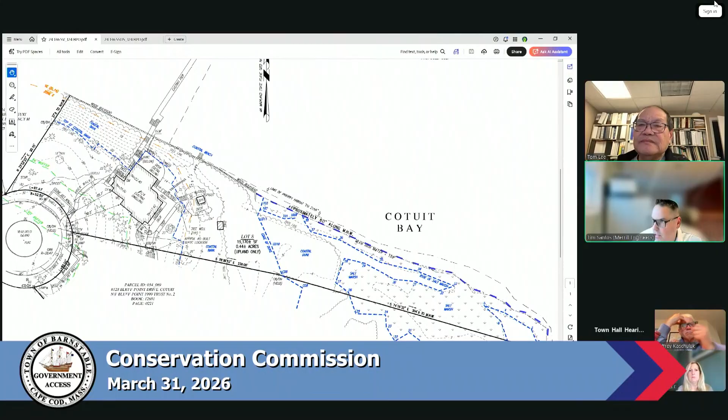So I'm going to switch over to the proposed plan. What the applicant is wishing to do is to tear down the existing home, construct a new home and deck, which will be serviced by a new Title V compliant septic system with denitrification components as far away from the top of the bank as possible. All the roof runoff will be collected and diverted to a dry well.

The applicant is pulling the house back from the top of the bank where it sits now. When we did our redevelopment calcs, there was a reduction within the 0 to 50-foot buffer of 370 square feet, but there is an increase within the 50 to 100-foot buffer of 719 square feet. So in order to meet your performance standards, we're required to plant 2,157 square feet of mitigation plantings.

We're actually proposing to plant over 2,800 square feet. There is 1,150 square feet that runs along the top of the bank into the north of the house and existing lawn areas to the west of the house. And then to the north of the house, there's lawn and existing developed areas that currently is a deck with a spa and some walkways that we're proposing to remove and plant. That's 1,650 square feet, totaling that 2,800 square feet of mitigation plantings.

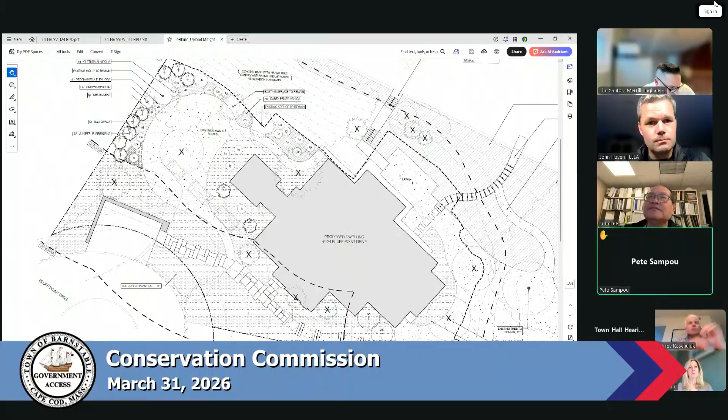Follow-up question? Sure. Pete? Okay, so yes, you have an equal number of trees going back. If you were to base it instead on diameter of the trees, what's the ratio of the total diameter of the trees that are being cut compared to the total diameter of the trees that are going in? Because sometimes we actually ask for, if you cut a 12-inch tree, then maybe you should be putting in 2 smaller ones. So if you could just brief me, the rest of the commission, and the public on that ratio, please.

Tim, do we have that information readily available? I don't know if we ever added the total. I don't have that readily available right now. I would just ask that can we just let Wilkinson do their presentation, and then we can address all the questions at once? Sure. Because the overall project, there's 2,157 required for mitigation. We're proposing 2,800 of mitigation plus an additional 3,900 square feet of invasive removal, plus the D-Night system.

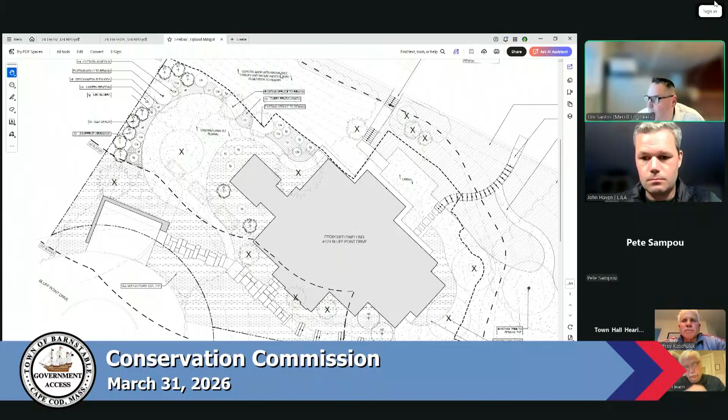So yep, the overall project is definitely an improvement, but let me see if I can get that number while Ian's looking at his, even if it's just a rough estimate. Yeah, not a problem. And Peter, as you recall, that's usually done at chest height. That's usually what we look at. Right. Yes. Ian? All right, thank you very much.

I'll share my screen briefly. And can let me know that this is being seen. I'm going to show both the plan and this diagram, which I think is a simplified way to look at it. For the record, Ian Peach, presenting the project tonight from Wilkinson Ecological Design. Our ecological restoration design really has 2 primary aims. Create a vegetated buffer along the top of the bank, where none currently exists, and enhance existing vegetated buffers to protect the resource areas of the property.

We also want to restore, you can see over here in the lighter green, with the mind to conserve this really nice existing native tree canopy and understory, and protect it from invasive plants moving across into that area. That is really nice overstory and understory to make one comprehensive mitigation approach. We're finding on site in our invasive plant management areas shrub honeysuckle, Asiatic bittersweet, multiflora rose, vine honeysuckle, rugosa rose.

I pointed out that area on the western portion of the bank, which I think is important to note, that we're going to amplify and lock into what's an existing area, conserve that and protect that by doing native plant community restoration and invasive plant management. I also want to note that to the further east side, we have an existing cedar grove, similar condition. Really important to get in there, manage the invasive vines and plants before that is further degraded. So really, we're kind of locking in the 2 areas, helping them from degrading further or beginning to degrade, and connecting them with a focused invasive plant management and native plant restoration approach.

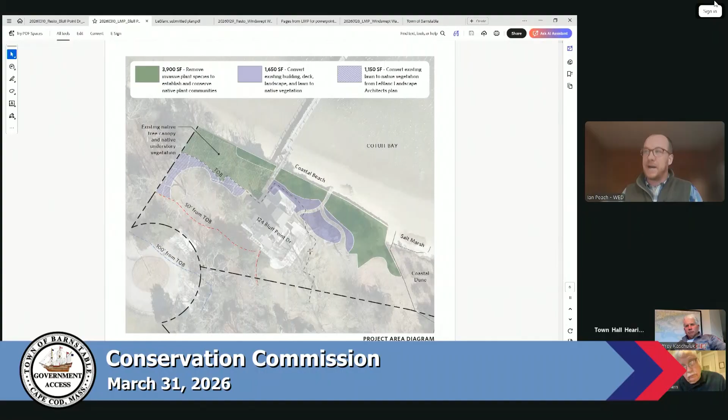And then we're going to have an expanded buffer and an expanded wildlife corridor, which is what we're always looking for. If I zoomed out right now, you'd see that it's going to create a little bit of connectivity further to the east, and we're working across the entire area. So that's really what I wanted to point out. I'm happy to speak more to our methods and specific species, but overall, including that invasive plant management and that lawn conversion to native plant communities, we're looking at 5,550 square feet of mitigation for the project. So happy to talk to anything further.

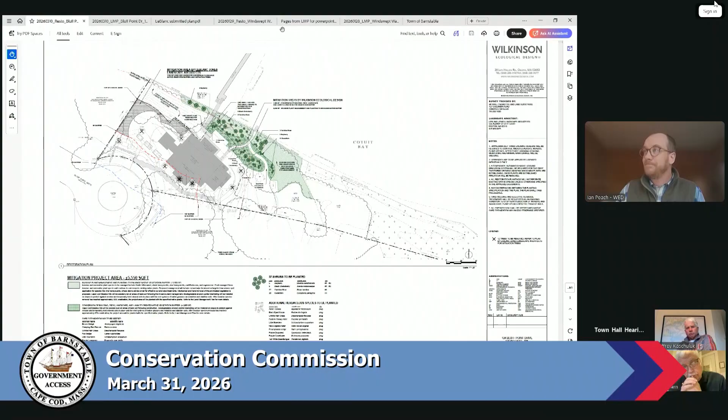Thank you, Ian. Any questions from the commission? I do. John? Oh, sorry. Bill had his hand up. Bill? Well, yeah, the narrative suggests that the limit of work is about 40 feet from the coastal dune. That was kind of a minor flag for me, but I'm thinking all that amounts to is invasive management. Is that right? Or perhaps deck removal? Let me bring up the site plan. Hold on a second.

So the coastal dune is down here, if you can see where my hand's moving around. Yep. And there's an existing shed where the limit of work's going to run right in this area right here. So there is no work being proposed in the dune, near the dune. The limit of work's going to run along the existing tree line. Okay, thanks. John? No, Rob has got his hand up. Oh, Rob? Is there any way you can bring up the proposed plan? It's up right now. This is the proposed? That's the proposed, yes.

All right, so behind the house, where the number 18 is, what is that? That's just a lawn area. Currently, right now, that's a deck area. So what's that going to be? It's gonna be a lawn. Right now it's a deck, and it's gonna be a lawn area. Do we really want a lawn that close? I mean, I'm asking my fellow commissioners.

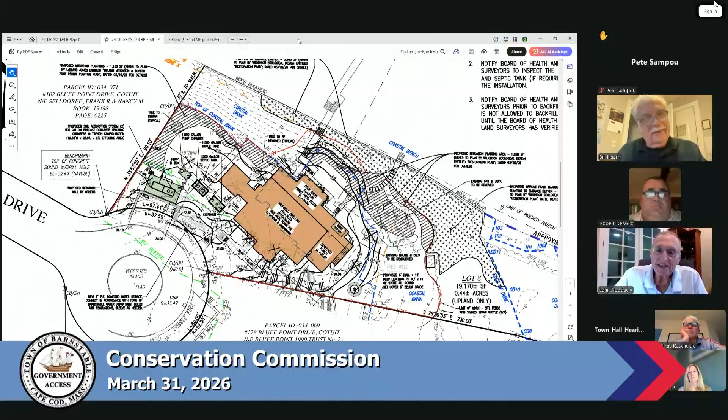Well said, Bill. A couple of things, Tim, on your mitigation calculations. I think you have some credit that you did not include in your calculations, because in your net alteration within the 50-foot buffer, you have minus 370. Yeah, so we didn't claim that. I was on while another project was going on, so there was some kind of conversation. So I went with a very conservative approach and just went 3 times the 719. We didn't go 719 minus the 370, then 3 times. So it's probably even more than what they need. Okay, I just want to be honest with you in terms of the calculations.

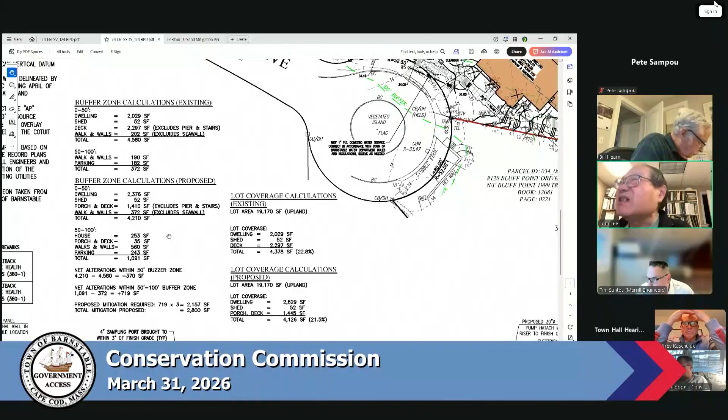Secondly, I think we need some distance from the bulkhead to your building. Right now, there's no distance label. So I need revised plans to show me some distance on that one. Yeah, that's not a problem. I can get that added for you. And then I think we would probably need some demarcation on the mitigation area. So are you asking for it as part of a condition, demarcation so that it doesn't get cut into? Yeah, I want that included as part of the revised plan. When you're adding the dimension, you're adding the demarcation line along the mitigation area.

So what would the commission be looking for as far as a demarcation, just so LeBlanc can weigh in on whether that's acceptable to them? We have a few alternatives: some stone every so often. You do wooden posts, concrete bollards, stones, fences, single rail. I've seen different boards with different things, single rail, the concrete bollards with some type of rope. I've also seen stones every 25, 50 feet, depending on what it was. Right. Okay, I'll talk with John about that. So we're open on that one. You can take your choice.

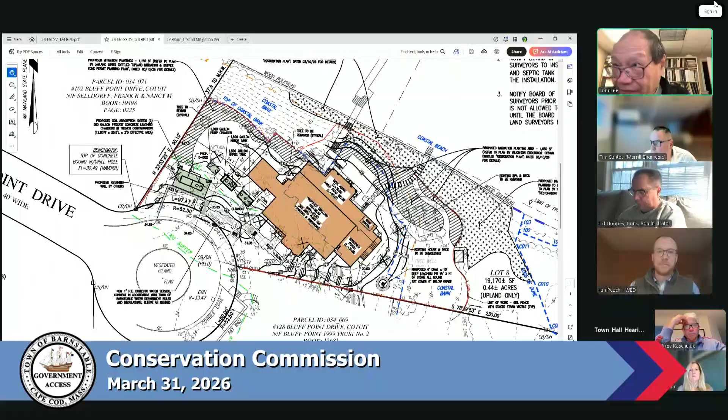And I just wanted to know whether or not they need an ongoing condition for invasive control. I think you probably need one, right? You want one? I would suggest it. Yes, that would be preferred. Okay. Channel 18, any public comment on this one?

Seeing none. Could I have a motion to approve this project with the condition of subject to receipt of a revised plan showing the distance from the bulkhead and the demarcation lines, the coastal bank clarifications, and I think that's about it, right? Oh, and labeled the lawn area. And then with ongoing conditions for the invasive removal, and then a monitoring report for 3 years. So move, Tom, if you're ready. Yep. So move. Second. Roll call.

Abadili. Just a comment too, we push this denitrification. It's voluntary now, so I want to thank the applicant for doing that. I personally think that's a critical aspect of improving our environment. So thank you. I vote yes. I agree. DeMello. Aye. I'm voting aye. Lee. Aye. Kaschuluk. Aye. And Sampu. Aye. And that is unanimous.

Thank you. Good luck. Thank you for your time. Have a great week. Yep.

Thank you. The second NOI is Henry Blair Trustee, Henry E. Blair and Raymond M. Murphy Trust. Maintenance dredging of Mill Way Marina at 275, 277, and 295 Millway Road, Barnstable, as shown on the assessor's map 301, parcel 063-001, 063-002, and 065-001. Who would that be?

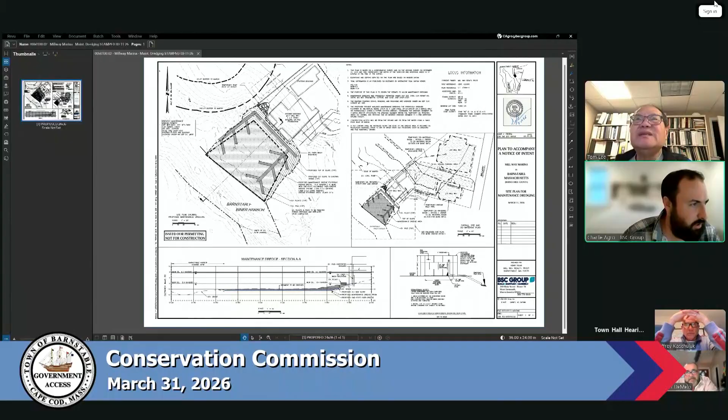We're proposing dredging by both hydraulic and mechanical means. So that would be a hydraulic dredge, such as the county dredge, which concurrently dredges and pumps the sand up to an upland area. So we're proposing 2 dewatering containment areas as shown in the overall site and dewatering plan. And then we're also proposing the project be completed by mechanical means such as an excavator on a barge or clamshell dredge. It was previously dredged in 2020 with a cutter suction dredge and then cleaned up in the summer of 2020 by an excavator on a barge.

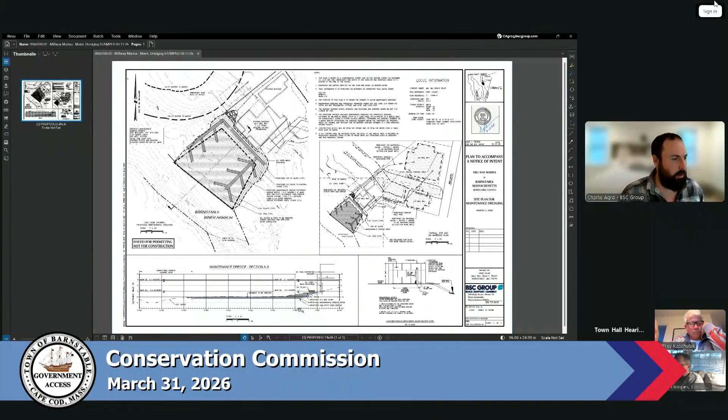This project will have to go through Chapter 91, 401 water quality certification, and Army Corps of Engineers permitting. We did also go through Waterways Committee last week, and they approved the project with few concerns. We'll also be going before the Shellfish Advisory Committee, I believe on the 8th of April. We also received a Division of Marine Fisheries comment letter, which listed some time of year restrictions, which we plan to adhere to unless there's some kind of emergency where we'd have to apply for a time of year exemption.

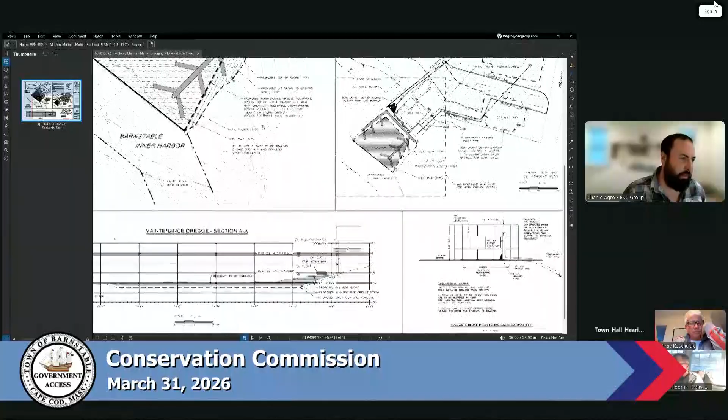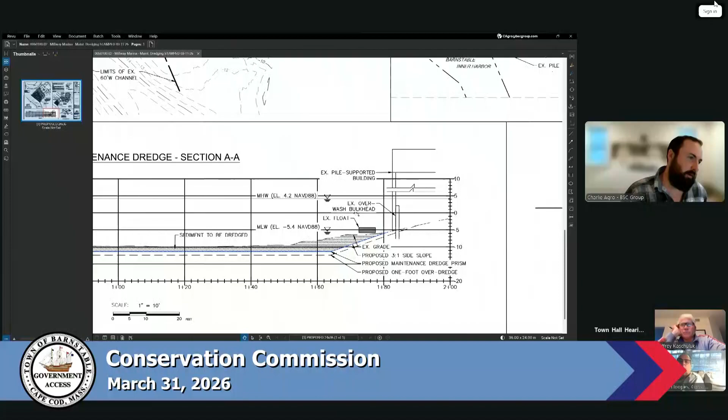One of the other comments also mentioned dredging within 25 feet of the mean low water line. That concern is addressed by the existing overwash bulkhead. There's a bulkhead that's existing between the offshore dredge area and the beach itself. So sloughing will not occur in this instance because the bulkhead is retaining that sediment. Open up to any questions at this time.

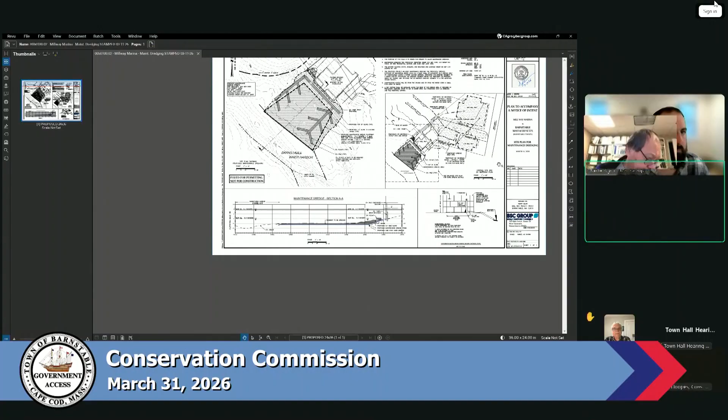Thank you. Any questions from the commissioners? Bill? Can we go back to full screen? Here we go. I'm a little confused about the dewatering. The narrative suggested dewatering either on a barge or in a parking lot, and yet you have a parking lot, and it looks like you have done that before.

Are you thinking that what does it mean to dewater on a barge? It sounds like you're liable to have sedimentation in the water. Is that true? So dewatering on the barge would be if it was...

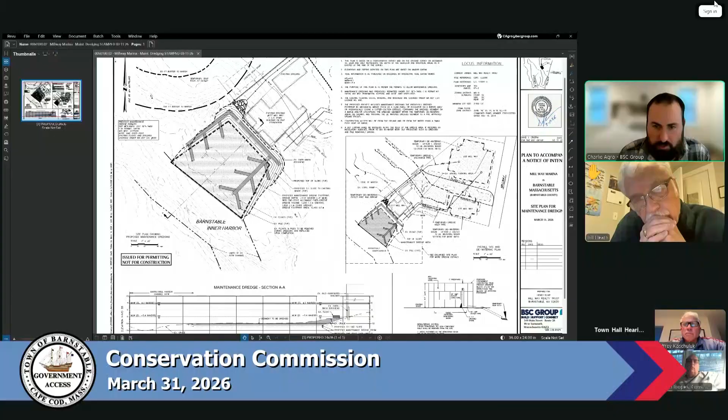Dredged by mechanical means, by a clamshell dredge or excavator on a barge. Local companies such as Robert B. Our or Hyannis Marina have excavator on a barge type dredges with a holding tank that's on the barge itself. They'll scoop the sediment with the bucket from the excavator and put it in the holding container that's on the barge. Larger companies will have a scow, which is a separate, bigger barge.

This is a relatively small project. We're looking at 1,200 cubic yards to the design grade, and then an additional 600 cubic yards on top of that to the 1 foot over dredge. So relatively small dredging project.

But when it goes into a barge, then what happens to the wastewater or whatever? So typically when you're loading into a barge, you would continue adding the sediment, which contains some water as well. As you're adding the sediment to the barge, eventually water will start to seep out through the weep holes in the walls of the barge or over the top of the barge. Eventually the sediment will be transferred to a pre-approved upland disposal site. Like if Robert B. Our, for instance, does the project, they have their own pre-approved disposal site with an approved BUD, so they can drive their barge right to their facility and offload the material upland.

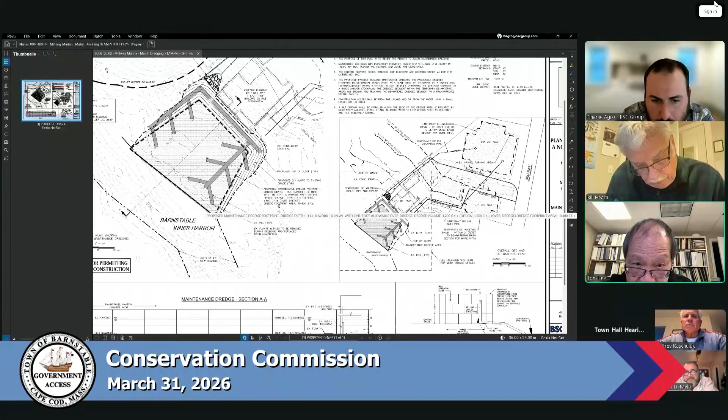While you guys are thinking, I just want to read the comment from the DMF letter that Charlie was mentioning. DMF has about 4 comments. One, a time of year restriction should be observed on all in-water activity to protect the sensitive life stage of winter flounder and horseshoe crabs. No in-water silt-producing activities such as dredging should take place from February 1st to June 30th of any year.

However, work may take place from February 1st to April 30th if the proposed silt curtain is installed prior to February 1st. The second one is DMF recommends the top of the slope be no closer than 25 feet from the mean low water line. Dredging the toe of the slope near the mean low water line may result in the sloughing of the intertidal habitat. The dredging footprint, as proposed, does not meet this recommendation. I think Charlie addressed that point already from that discussion.

The third, if approved, any activities requiring a barge should be restricted to 2 hours before and after high tide to prevent barge grounding in the marine habitat. The fourth one is the fuel spill from the refilling of the construction equipment will adversely impact sensitive resource areas. Impacts to resource areas can be avoided by prohibiting all land-based equipment from being refilled on site. If equipment is refilling on site, adequate containment and cleanup material should be required to minimize the impacts.

The other thing, Charlie, we have not received the DEP number. Is that correct from your record? I am not 100% sure, I can look into that. As far as our office record, we have not received the DEP number.

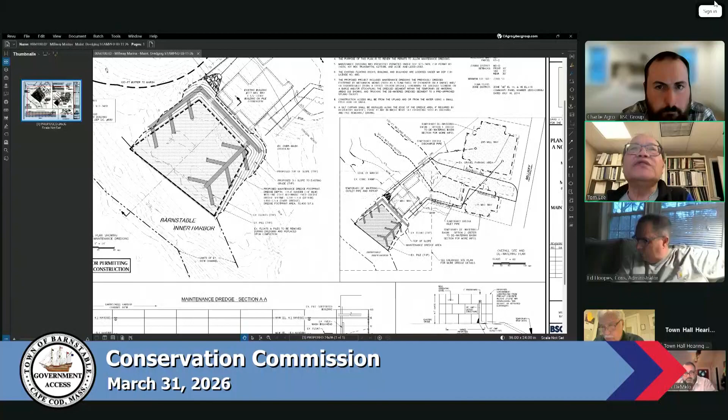Understood. Ed, is there any shellfish comment on this from Natural Resource? No, we have not gotten any letters from that, and I believe you said they are scheduled for Shellfish Committee. I'm sorry, I know you said the date, but I don't know if it's the 18th. April, I think 8th. April 8th.

We're getting here from Waterways, I think, Tom. Yeah, the Waterways approved the project. Yep, I saw that too. So I would suggest, Tom, then as you continue, wait for the shellfish comment and DEP number.

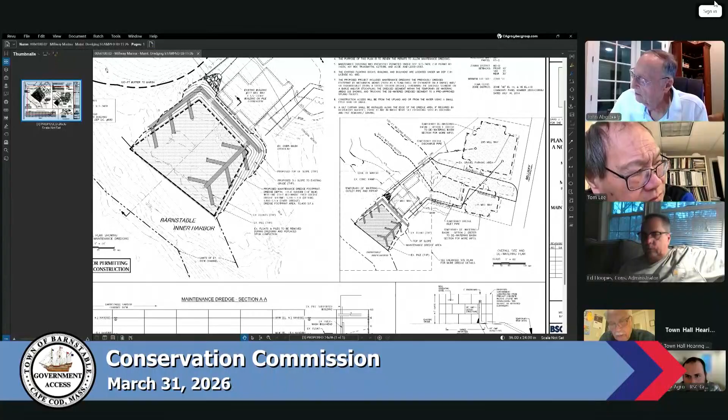Okay, Bill, your hand's up. Yes, it is. Are we going to be applying the DMF conditions to the permit? I think it's the time of year restrictions. What about the other requirements about fuel and barges, the low tide restrictions, et cetera?

Yeah, I'd like to make a comment on that third DMF comment, if you guys are okay with that. Go ahead. So they say that the dredging shouldn't take place at any other times outside of 2 hours before and after high tide, which is a pretty tight window, and we've already got... it's actually a pretty deep site right now.

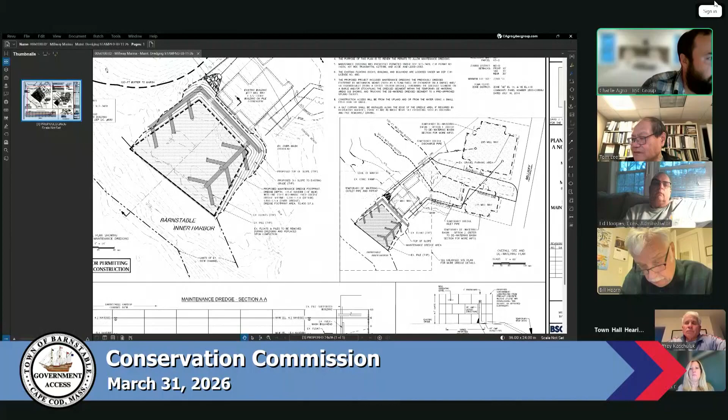It's pretty close to 6 feet at mean low water, and it's just the shallow portions of the marina that need to be dredged. So I think the condition should read that there needs to be 2 or 3 feet or so below the barge.

I think when they say 2 hours either side of high tide, I don't think they actually took into account what the actual depths are on site, or what the barge itself drafts. You bring in a huge barge and it'll be aground right away at high tide. If you bring in a small barge, you could probably do the work at low tide without ever hitting ground. So I think that's just a little too vague in general.

I think the more important part of that condition is that the barge does not ground out. So if it's 3 hours on either side, whatever it is, that's okay—it's more important that the barge does not ground out. I just don't want to restrict construction to a 4-hour tidal window each tide cycle; that would be pretty tough for the contractor.

The other thing I want to mention is, since you dredged this area before, we must have previous order conditions, and we can look at what's in that condition since we're continuing with this. Also, since this was previously dredged, I want to double check in our file whether you have a file on the footprint, to make sure the footprint matches what you're applying for.

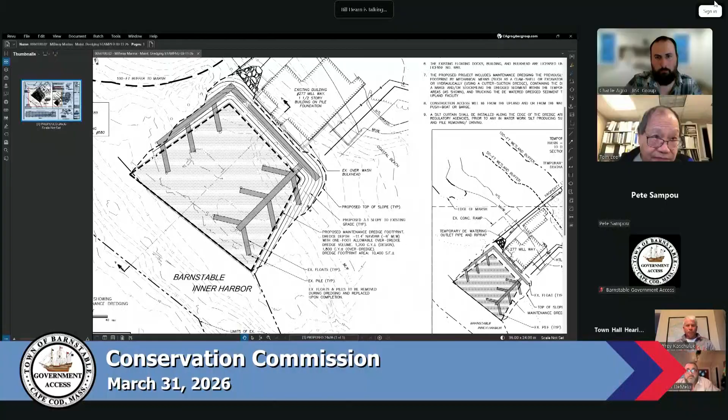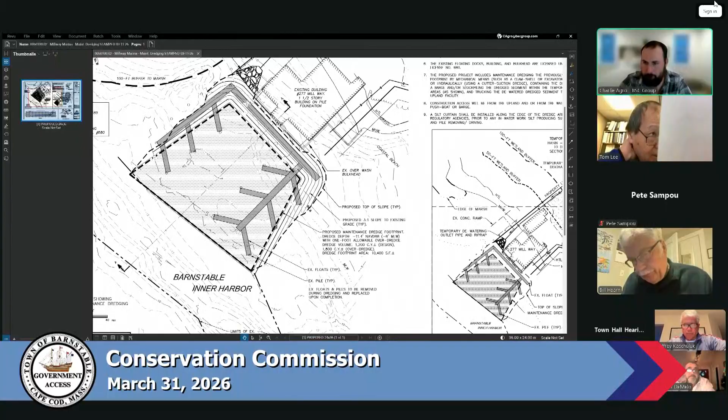The last NOI of this evening is Gary Sobel, proposing construction of additions and renovations to an existing single-family dwelling, and after-the-fact repair and replacement of a wooden stairway to the beach at 546 Wakeby Road, Marston's Mills, as shown on assessor's map 028, parcel 028.

Good evening, Chairman Lee, members of the commission. Dan Ojala, surveyor and civil engineer with Down Cape Engineering in Yarmouthport, helping Gary Sobel with permitting at his property at 546 Wakeby Road out in the Mills. I'll share my screen so you can look at the project.

It's overall a fairly modest proposal on a huge site, over 2 acres, with almost 1.9 acres of upland. It's on Long Pond, just east of the camp to our left. There's a small private pond on the east with a little bordering vegetated wetland around it, and of course the edge of Long Pond, a great pond, with wetland flags delineated by Brad Hall.

We're here for a small addition mostly outside the resource areas—outside the 100-foot buffer except for a couple little nicks—plus some infill of a porch in the 50 to 100 foot zone, all landward of the existing development. It's an older home that's been there many years; we put in a 5-bedroom septic back in 2013 or so, and this proposal is pretty benign, putting in a roof drain to handle the roof runoff.

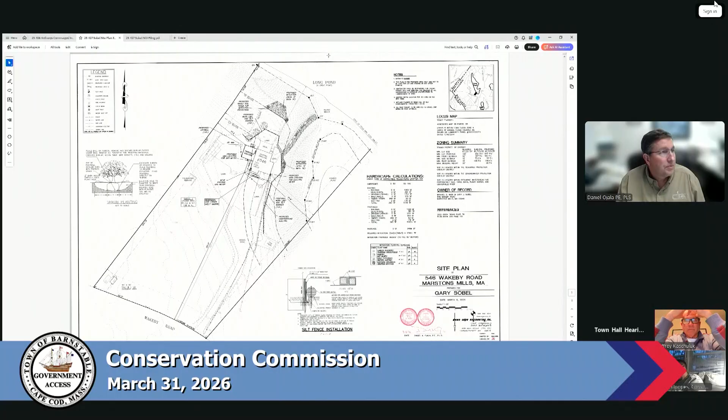Your regulation does have a backstop—if you fully mitigate the 50, then you can have hardscape outside of that. So I would respectfully ask not to infill that little bit extra, since it would be awkward to do. We meet the letter of the law, and he's a pretty good steward of the land—it's almost all natural except for the little house footprint on that big 2-acre site.

Okay, then, thank you. Any question from the commissioners? None? Channel 18, any public comment on this one? Seeing none.

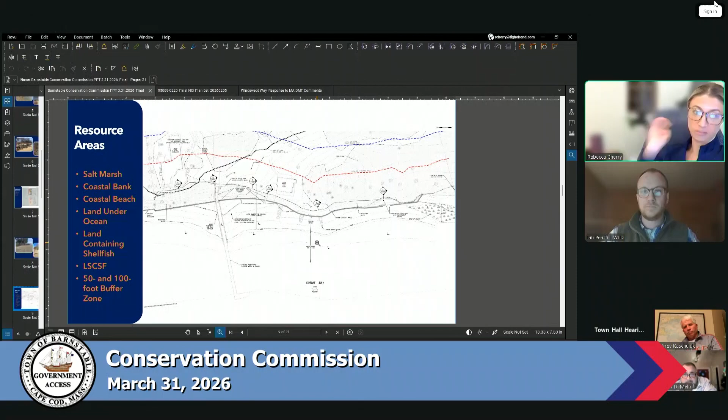Project need. So for obvious reasons, the existing seawall is failing. And it's at increasing risk for partial or even complete failure, whether that be from rising water levels or increased frequency or intensity of storms, storm surge. And with that risk comes the risk of the destabilization of the coastal bank and therefore the potential negative impacts to the adjacent resources surrounding that coastal bank. And further beyond that, with the existing structures so close to that coastal bank, the destabilization of that could compromise the structural integrity of those adjacent buildings.

So the primary goal of this project was to maintain the current function of the existing seawall, but obviously extend the life with a new structure and also preserve the visual character and the ecological function and continuity of the shoreline as a whole.

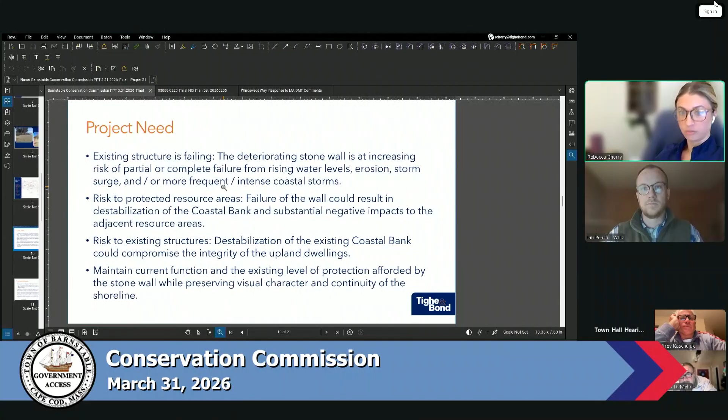So getting into proposed activities. So the roughly 500 linear feet of the existing deteriorated stone wall is proposed to be replaced with around 375 linear feet of an anchored timber bulkhead, and then around 130 feet of that nature-based solution, that fiber roll array that Ian mentioned previously.

And the reason we kind of broke it into two pieces is we really wanted the northern portion of the site, where there's existing infrastructure and developed upland directly abutting the bay, we wanted to put the structural support in that area, and then where the shoreline transitions into a more undeveloped natural condition, we propose the fiber roll array in the aim to maintain that ecological function and also minimize impacts to the coastal bank and the adjacent salt marsh.

So we also have oriented the transitions at either end of those elements, the timber bulkhead and the fiber roll array, to minimize potential for end effects associated with abrupt changes in shoreline geometry. We wanted to try and minimize anything associated with those types of negative impacts.

And supplementary to the major portion of work, there is going to be minor removal and restacking of those existing groins, probably just a little bit of the stones in front of the existing wall, to be able to put the new wall in. And then same with the timber pier, just a minor amount of pulling off of the superstructure, the decking, to be able to put the new wall in, and then that'll just go right back.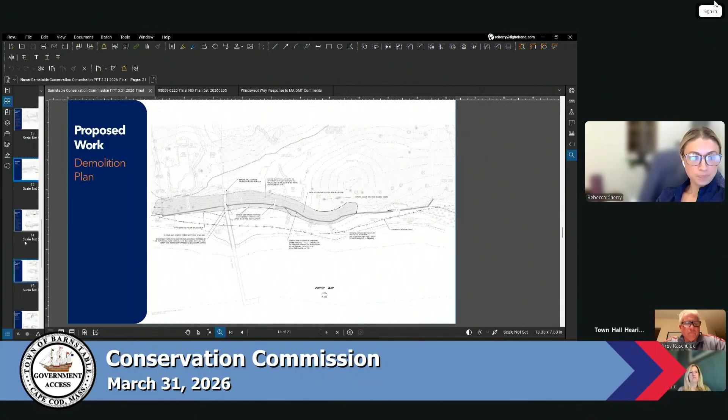And then getting into the proposed work plan. So this plan shows, and I can go into more detail on the full scale plans at the end of this if you'd like, but this just shows the general layout of the new timber bulkhead following the alignment of the existing stone seawall, and then the nature-based solution fiber roll array at the south end of the site.

And anticipated construction sequencing basically starts with mobilization of equipment, staging, erosion control, and setting up support of excavation, followed by the excavation needed to remove the seawall, removing of the existing seawall, installation of the new bulkhead, so the piles, anchors, wales, and sheathing. Again, this is timber. And followed by the installation of the fiber roll array to the south, the replacement of these two small timber stairways, which you can see one over here and one's over here.

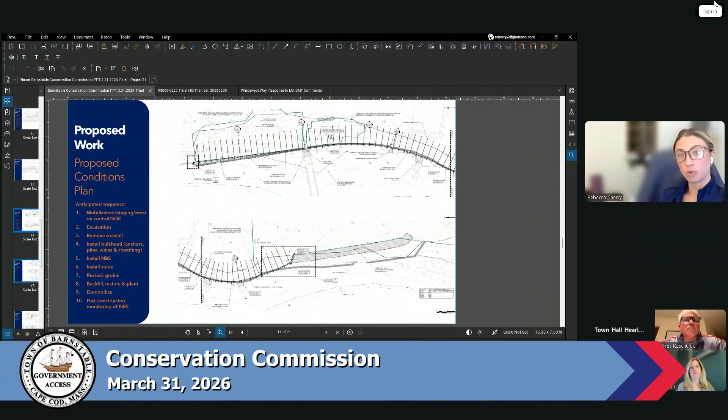And then the restacking of the small portions of groin that are removed, the replacement of the small portion of the timber pier superstructure, and then the backfilling and restoration and planting of the upland behind the new wall, followed by demobilization and then post-construction monitoring of the fiber roll array as needed.

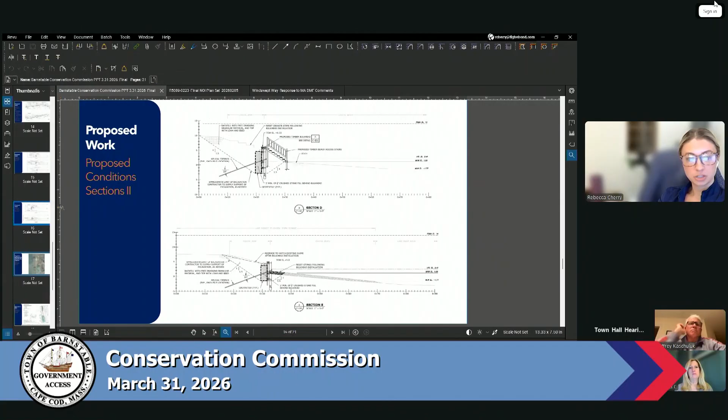These two slides are just quick illustrations of section views of the bulkhead along the alignment. Again, I can go into these more in detail later if you'd like to see more, but just to give you a general view of what we're looking at here in section view. And then followed by Ian, here's where we can talk about the vegetation management and restoration. I have this slide and then I have the following plan on the next slide. So let me know how you'd like to.

Thank you. I'll be pretty efficient here because I sort of set the table. So I appreciate commissioners bearing with us while we lay out all the details. So this just more clearly depicts that north and south area as a comprehensive approach. Both areas will receive invasive plant management for the species I mentioned. They will receive a native seed mix, and an erosion control blanket where needed on certain slopes.

And then that blue area is the really interesting and important adjacent existing native plant community, sort of savanna-like meadow with both shrubs, overstory, and really encouraging species to see, so we feel like we get extra benefit by managing the invasive species that are in their heaviest concentration directly adjacent. This area also, in terms of the invasive plant management, is directly behind the nature-based solution of the fiber roll array.

So working seaward to landward, we've really got a nice approach to actually be able to manage the shoreline with a fiber roll array, nourish and plant with a 3-to-1 slope so we can really get some nice salt-tolerant native species actually growing on the bank. Then it will transition going inland to the invasive plant management and native plant community area, and then to that protected meadow area that we want to conserve and just manage through thoughtful mowing and some early detection, rapid response if we see any invasive plants. So that's the real approach.

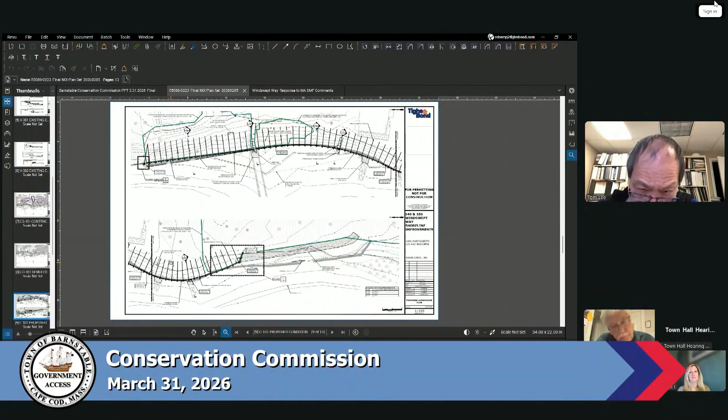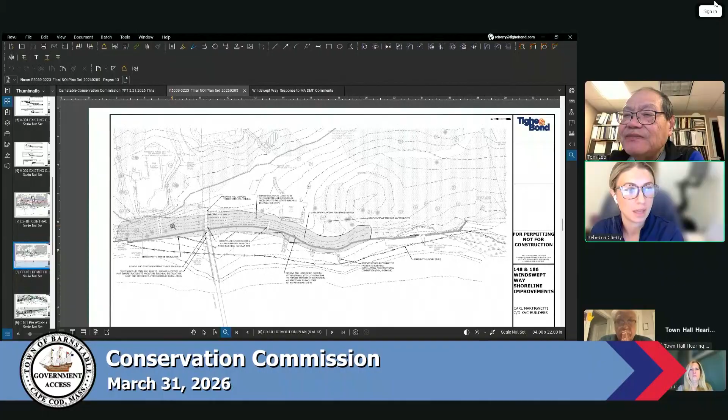But one thing, if you don't mind, go to the demolition plan, C-101. Can you explain a little bit more about what you are expecting to do in that demolition plan? Do you know how deep the existing stone wall sits below grade? A couple of feet? We don't know. We weren't able to decipher that when we were in the field. We're anticipating, based on how old it appears to be, it's probably not that deep. So the demolition footprint that we're showing here is essentially the maximum that we would anticipate.

It's ultimately going to be up to contractor means and methods and how they want to pull that wall out, under obviously the existing stipulations that it needs to be done from land. But what we're showing is essentially, with the subgrade that we have out there, the very loose sediment, if we needed to slope up to be able to put the wall in to the elevation that it needs to be in, that's the maximum excavation footprint we could anticipate. So that's what we're showing here.

And then additionally on here, what else are we showing? We're showing again the small portion removal of this existing timber stairway, a small portion of these existing groins, again, just enough to be able to get this new wall in, and then putting it back. Let's see what else. The timber ramp and railing, again, that's all associated with the stairway removal. And then that's pretty much it.

But yeah, we don't unfortunately know the extent, the depth of the wall. There's not much record of it. It's unlicensed; we couldn't find any history of a license. But based on other historic stone walls along the waterfront, like I said, we're not anticipating a robust foundation, which is probably why it's destabilized and kind of falling apart at this point.

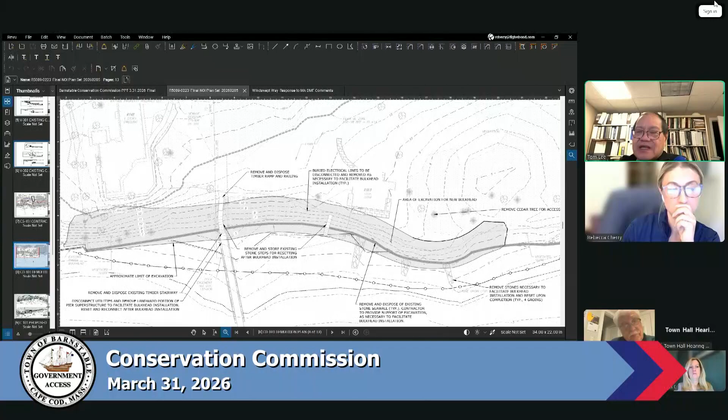Can you tell me the distance from the beach side towards the front end of the existing stone wall, and the distance from behind the stone wall? It looks to be almost 10 to 15 feet wide from the front to the back end. Are you talking about the distance from this front of the excavation to the wall? Yeah, and then from the wall to the back side. Because basically you probably have to excavate it, slope it, so you clear all the stuff.

So this is kind of how we're showing it. It's easier to see in section view. So this is the proposed wall. These are the timbers kind of running in and out of the page. So we're excavating down to the bottom of the lowest timber element that we need to put in, and then benching it up as minimal as possible at a 1.5 to 1 to minimize that area to be able to put the timber members in. And then we're assuming the same bench slope backwards.

But ultimately, the contractor could choose to put in a temporary support of excavation system back here and shrink that excavation up so that it's narrower. We were showing the maximum footprint just to be conservative in the presentation of the application materials to make sure we're not undermining it. But yeah, we're looking at here 4 to 5 feet probably. But that varies depending on the beach elevation. Doesn't vary too much in front of the wall, but a couple feet.

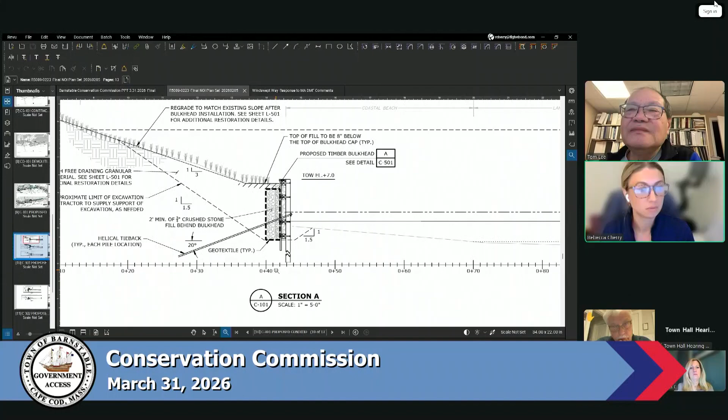So it probably varies between 5 and 10 feet between the face of the existing wall and the limit of excavation. And then again, behind the wall, it varies, but I can estimate it; that's probably 20 feet back, 20 to 25 feet probably behind the wall. Wow. Okay. But again, that could shrink down depending on what the contractor wants to do.

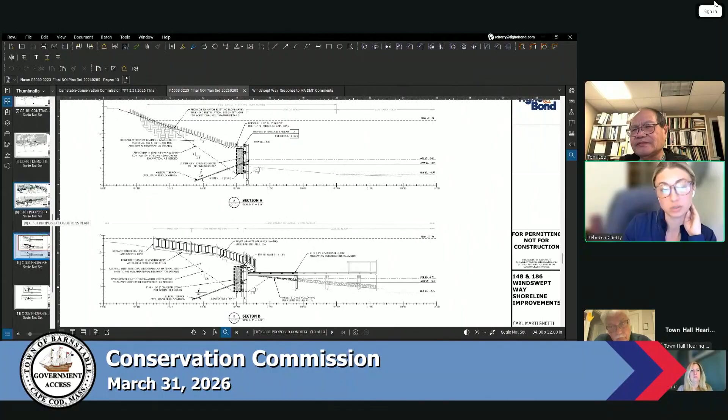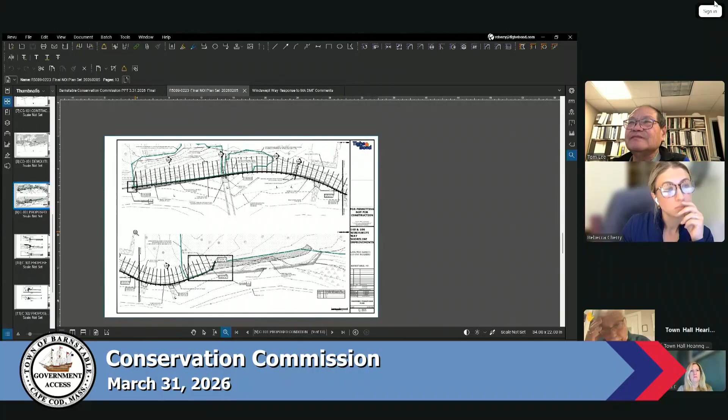Thank you. Any question from the commission? Bill? Yeah, I'd like to just make a few comments about new bulkheads. For one thing, we as a commission have not approved a lot of new bulkheads. We may be approving old ones that need to be maintained or whatnot. I can remember one project, it wasn't too long ago, and it was a boathouse that was going to get washed away. And I think that might have been the first one that I have personally been involved with.

I think that new bulkheads, new vertical bulkheads, are not a good thing for habitat. And what happens is that as the water rises, you lose shallow habitat, and young of year fish need that to escape predators. And so when you end up building a vertical wall, you end up essentially eliminating young of year habitat of really small fish. You could have silversides, for example, that might get into the shallow water.

I went into this project going, a new one, I don't know. But then I saw that stone wall, and that is a vertical stone wall. And I think that makes all the difference in the world. So this commissioner is generally not supportive, and I don't like new vertical walls. You have one right now, and it's a stone wall. And the fact that you're doing some really good work in the southern end using an ecologically sensitive approach, I'm supportive of the project.

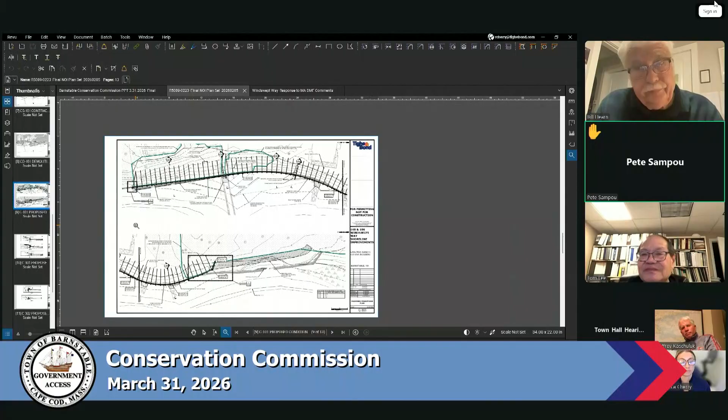But again, here in this instance, the total benefits of this project, I'm okay with the filling in up to the old existing stone wall. But in other cases, loss of shoreline, I would be less inclined perhaps to allow that filling in after something's been eroded away.

It's happening at Sandy Neck. We are retreating at Sandy Neck from that shoreline because you cannot maintain most shorelines that are sandy, at least, with a rising sea level and a greater intensity of storms. But in this instance, I am in support of this project before us. Thank you. Thank you, Pete.

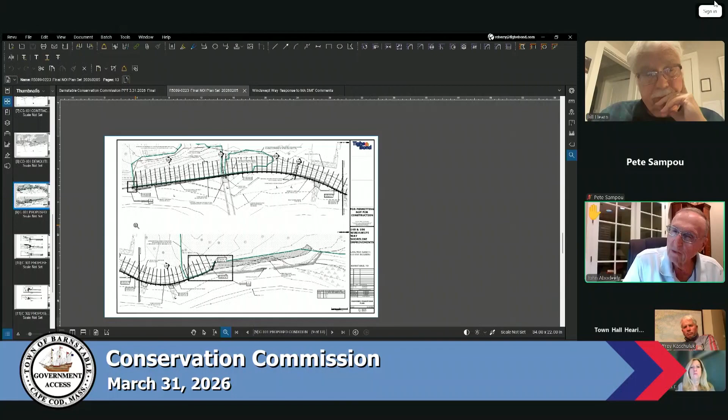John? I was curious about, obviously I'm concerned about pulling those rocks out and what it's going to do. I think, Tom, that's where you were going with your concerns, but the tie-in, on one end, you had a tie-in with an existing wood bulkhead wall. Is that correct? And how are you going to tie those two together?

Yeah, so the neighboring property is a very similar pile-supported timber bulkhead. And so what we're proposing is with this new structure, essentially coming up so that it butts up against it and kind of 45ing a little bit behind it so that we're not allowing any material to spill through that interface of that bulkhead, while keeping the two structures independently structurally stable. So we're tying in with that one.

Again, we wanted to keep a cohesive frontage where we're not creating areas where we're going to have sediment issues and you're not going to have a disturbance of flow. So that's what we're proposing on the north end.

And then at the south end, we're proposing that same 45-ish degree angle and tapering down of the bulkhead to tie into that fiber roll array so that it's not an abrupt change in elevation. It's not an abrupt change in geometry, and it's kind of a softening into that natural shoreline where the fiber rolls are bending around at the end.

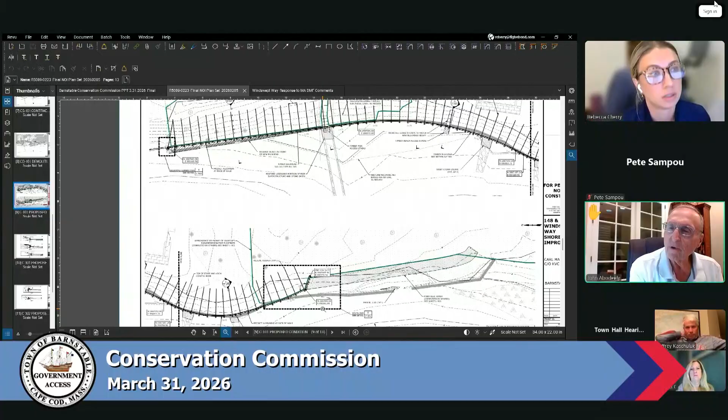Is that right? So the bulkhead bends around, and then yes, correct. We're over at this end. Yeah. Similar to how the existing wall does, but in a softer way. And at that end, you're tying into a natural area at the end of those fiber rolls. Is that correct? Correct. And it will taper into a similar grade. Would you anticipate any negative impact on that neighboring natural area from putting in these fiber rolls the way you are? Ian, do you want to respond to that?

Yeah, real quickly. So I don't. I think it's a good question. I had mentioned really briefly, we're actually, based on our understanding of the site, able to be at a 3-to-1 slope. So we're going to be able to really nourish and plant the entire array. So the array will really become plants over time. It's just its starting out phase to allow the plant roots to do the good work.

And that return into the bank is typical of what we've done for decades with fiber roll arrays. As it returns into the grade, it lessens the opportunity for any end scour. And this array itself will help with any refraction of wave energy from hitting that coastal bank or impacting the salt marsh that's further downshore. So by the return, the nourishment, and the planting, I think we're really going to get a net positive in that area. Okay, let's hope so.

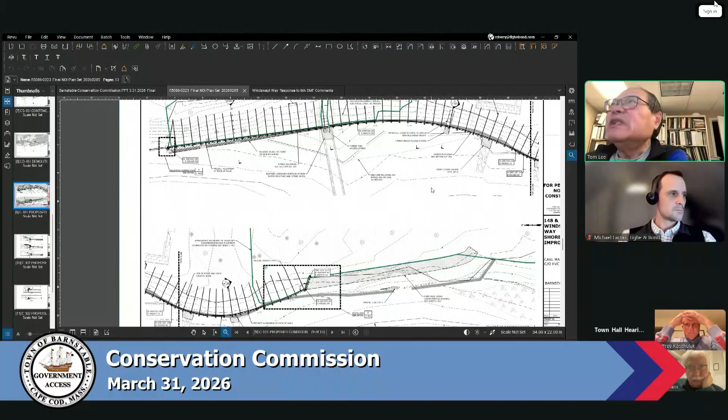I think Tighe and Bond, I'm calling it Tighe and Bond, is the consultant on this project. So if there is any change in consultant, we need written notification to the staff for review and approval. And Ian, do you need ongoing invasive management on your work? Yes, please. Okay. The other thing, do we need to continue this and wait for the Shellfish Committee?

We really need that, Ed, do you think, for this? I think that's the safest way to do it. If you approve the project right now, depending upon their comment, and they make comments that somebody doesn't, either you or the applicant doesn't approve of, then we're kind of in a bind.

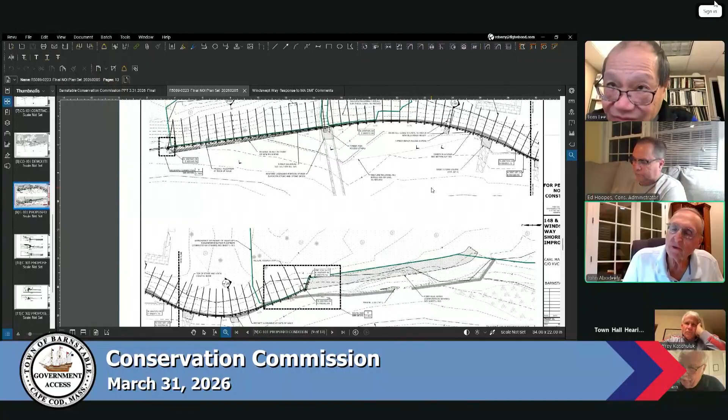Okay, well, I assume you have no problem with continuing this pending that hearing? If that's what's needed, no. I think we should continue this, just waiting for the comment and stuff. But we went through all that stuff, and those would be in the record, so it's easier next time.

When it comes up, before I do that - Channel 18, any public comment on this one? Seeing none. So we're going to continue this to April the 14th. Is that good enough for you, Rebecca? Yes, that's our next hearing. Could I have a motion to continue this to April the 14th?

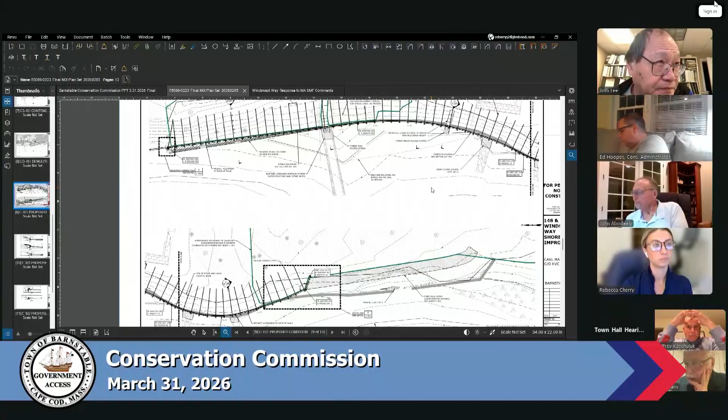So moved. Second. Roll call. Abodeely, aye. DeMello, aye. Hearn, aye. Kotchuluk, aye. Lee, aye. And Sampu, aye. It's unanimous.

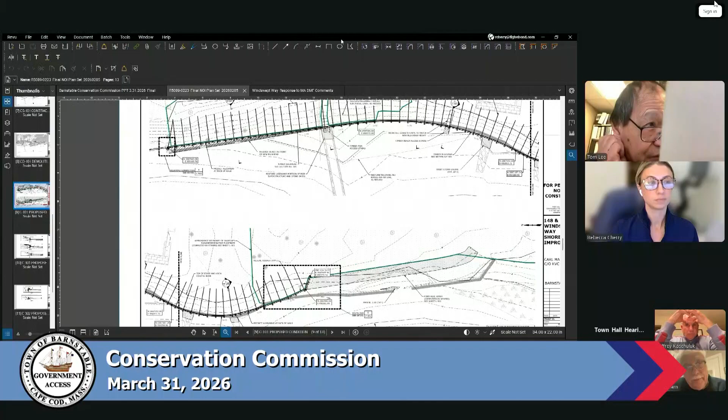The next continuance is Robert J. the Fourth and Thomas P. Remis, removal of brick paver patio, installation of permeable pavers patio and fire pits within the 50-foot buffer at 536 Shootflying Hill Road, Centerville, as shown on Assessors Map 193, parcel 029. This is a continuance from February 17th and March 17th, and on March 17th there was no testimony. The quorum is every commissioner for tonight.

Who is that? Oh, Michael? Yes, Mr. Chairman, Michael Malynowski with Allen and Major Associates. I believe on the line we also have Thomas Remis, the property owner, as well. And Rob Remis is on as well. Gotcha, all right.

So I'm going to share my screen. All right, can everybody see my screen? Coming up. Yes, thank you.

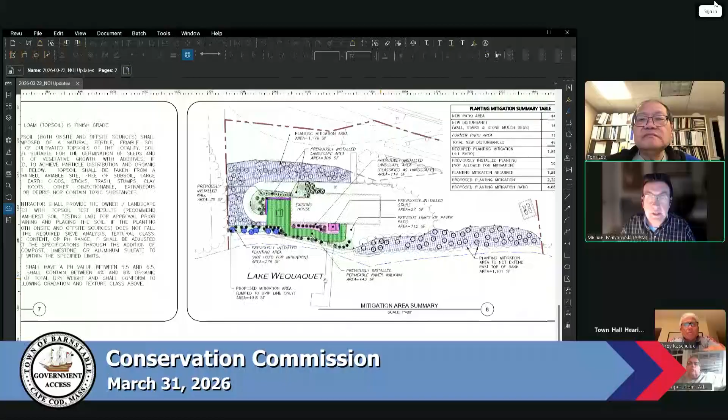This is the plan that was prepared. I'm going to actually jump to this plan, which may give a better understanding of the areas of impacts, what is being proposed for mitigation, and what was new disturbance. The green area shown is the proposed permeable paver patio that was installed around the existing home, shaded in green. We do have some new construction, which was for a landscape retaining wall in this location and a set of stairs.

The previously installed landscaping in this zone, because there is river rock at the base of it, would be classified as hardscape, so we have included that as part of our disturbance mitigation. We had 443 square feet of patio area. New disturbance, which is the wall, the stone mulch beds, and the stairs, is 166 square feet. There was an existing patio that was removed, allocated at 112 square feet. So we have a new disturbed area of 497 square feet, with a 4-to-1 ratio where 1,988 square feet of mitigation is required.

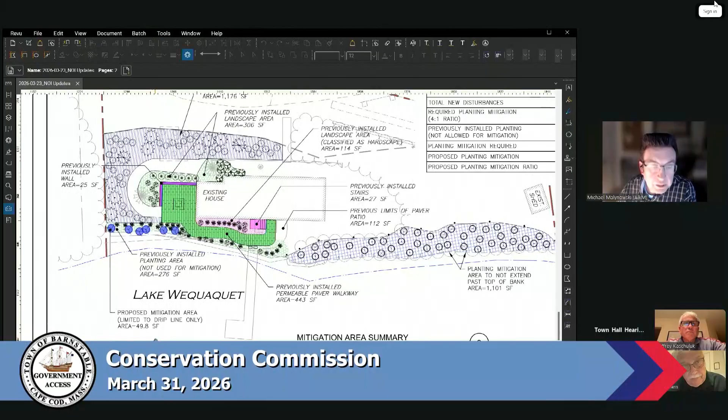And in this area, which was previously lawn, will be converted to mitigation area with plantings of native variety and a low ground cover mix. We also have 7 additional shrubs, and based on our discussions with staff, the drip line is what is allowed for the mitigation.

So with those plants, we have 49.8 square feet of mitigation. Based on those areas, we have 2,327 square feet of proposed mitigation area, which exceeds our 4-to-1 ratio. There was some discussion before about the readability of the plan, so we prepared this color figure, which better represents our assumptions for what was previously installed, what's being classified as disturbance, and what areas are designated as mitigation area.

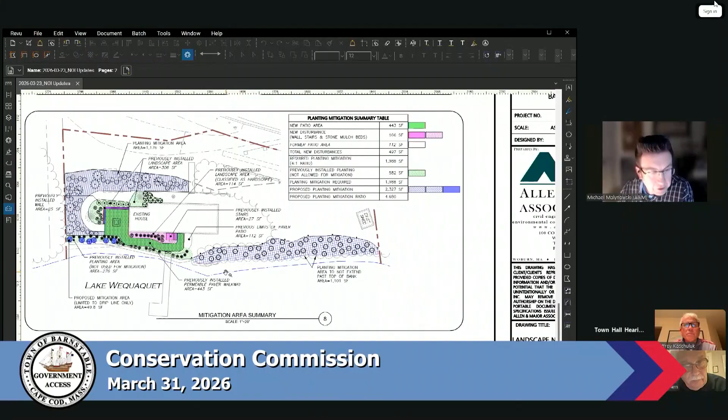I'll jump back to this. As previously discussed, in this mitigation area we are proposing to install wooden posts with conservation tags along this area to demarcate where the mitigation area is to be. And in this area here, we have erosion control barriers being installed.

This area here will provide a buffer towards the water as it sits within the 50-foot resource area. The area above is previously disturbed for the driveway, which will provide additional buffers to the water area.

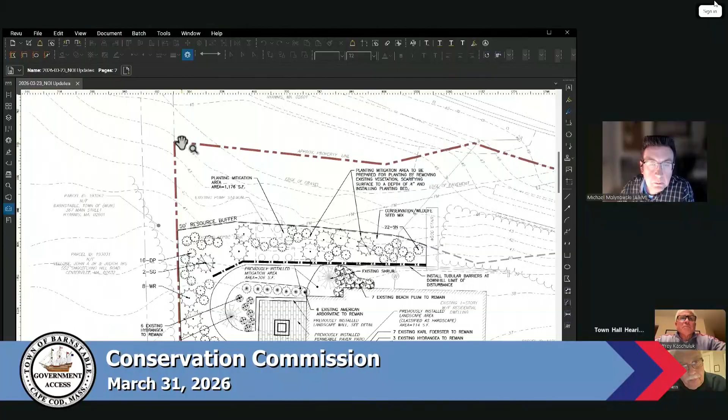There was also some general concern about the existing right-of-way through here. Previously, we had some plantings proposed up in this area. All of that has been removed, so all of the plantings and the disturbance are within the confines of private property. The dedicated easement area, shown here, is to be maintained as unmaintained and non-disturbed.

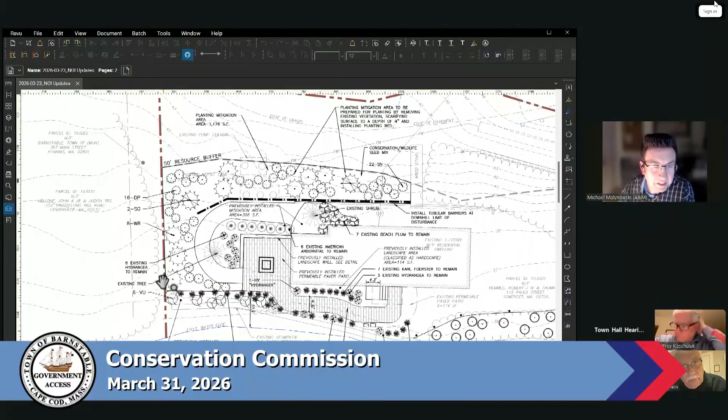So I'd be happy to answer any questions that the commission may have.

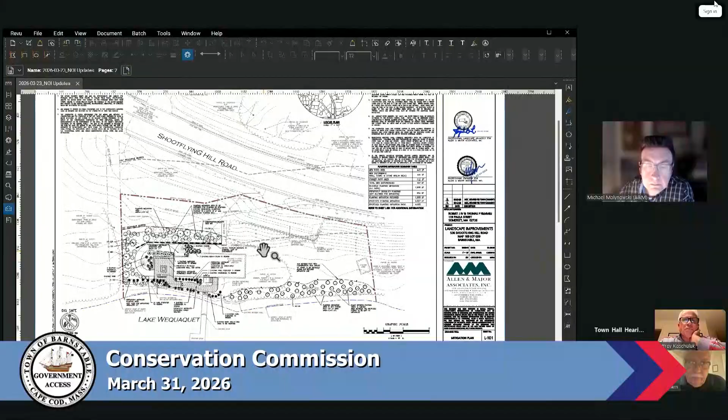In our file, there is an email from the abutter concerning the arborvitae and stuff like that, but I think you removed the arborvitae, right? There were some arborvitaes showing up in this area here. Okay, and all of that has been removed. The only arborvitaes are the existing ones previously planted on the back side of the patio area. Okay, thank you.

Questions, Bill? Yes. I've been to the site twice, and this project, this patio and the pathway, the permeable paver pathway, I can't imagine it being approved if it weren't already built. It is so close, especially that path is so close to Lake Wequaquet. It's amazing. The house is 6 feet away. The side of that house is like 6-7 feet away from the water's edge.

It does show existing water level, but it depends on what the lake is. Essentially the thing drops down right there, right at the house. So you put in a substantial development right close to the shoreline.

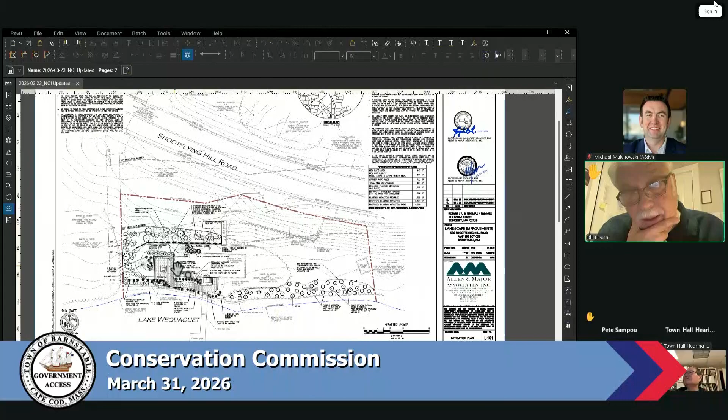But that pathway that comes along the way in the plan we're looking at right now says 4 foot 6 inches wide. I took a tape measure and tried to find the 4 feet 6 inches, and I couldn't find it. It's 4 feet 10 inches wide, and it's very... I don't know what the adjective is. Very slick, very, very well laid in stone pathway.

And from a functional standpoint, I just don't understand why you need to have that in such close proximity. I think it should be removed. I think this commissioner believes that pathway should be removed and replaced with some very modest stone steps, stepping stones. That's where I'm at. And the vegetation mitigation that you're doing would certainly compensate for this new very attractive patio you've built on the side of the house. But the pathway, it's so wide and so close, I just can't buy into that.

Thank you, Bill. Pete? Yeah, in our previous discussions about this project, not just Bill, not just me, but I think most of us had a real problem with that laid walkway. And I thought we were fairly clear that was something we would never allow if it wasn't already built and came before us.

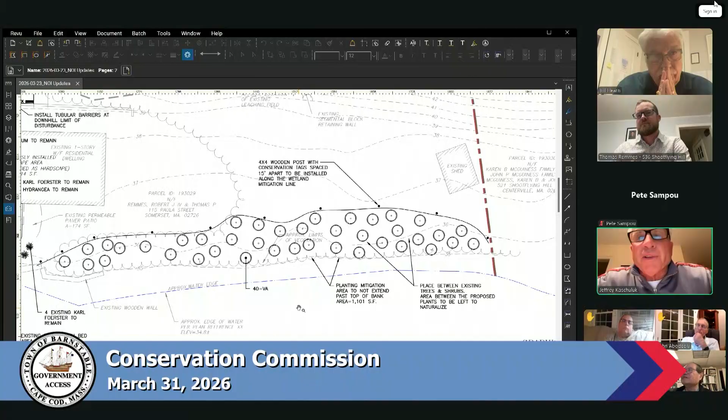But I agree with Bill as well. The walkway should be removed and replaced with a stepping stone type walkway. Yeah, we were just afraid with a stepping stone or a fieldstone walkway that it's uneven. We wanted something that was going to be more stable, that it wasn't going to be a tripping hazard. You know, I have 4 young children. My brother has 2 as well. If it's parents and grandparents that come there, we wanted something that wasn't going to be an issue of them walking around. If it's installed properly, there'll be no issue.

Yeah, and the other concern with that is those stepping stones, the stones themselves are in essence impervious. The paver walkway that is actually installed there will provide more mitigation for stormwater runoff that happens to come from that area, and dissipate that before it gets to the lake. What we've had for years over there is, because the retaining wall is so close, the house was built by our grandfather back in 1953. We've lost so much land from just erosion over time.

Now, both the wind pushes the water there, and anytime boats go by, the water just splashes over top of the retaining wall, and over time it's eroded pretty much that entire area. And that's why we have that hardscape there to provide a buffer to stop the erosion, as well as an area where we can enjoy the outside. As you said, the cottage is only 953 square feet. We're adding some outdoor space where our families can grow together.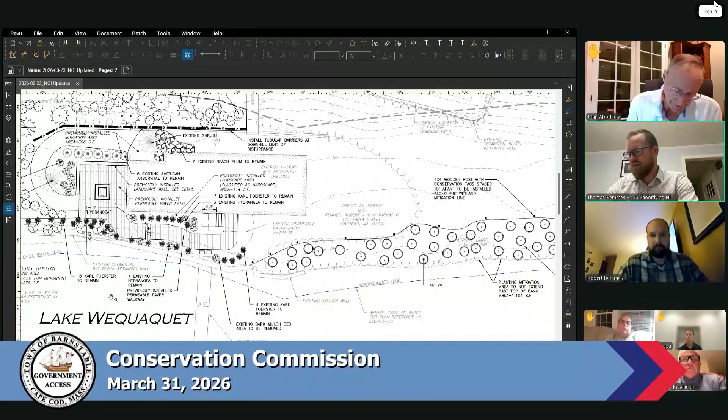Well, we did take the entire left side of the property up to the 50-foot buffer, with the exception of the patio and a small walking path around, so we have circulation around the property. All right, but as you look at that paved walkway from there to the breakwater, how much mitigation, how many plants do you have there?

We have 50 shrubs and 44 grasses and perennials. From the walkway, from the paved walkway? Oh, from the walkway to the retaining wall? Yeah. That was minimal. We can replace all of that with native species. Okay.

Well, I'm concerned that, as Bill said, this is an after the fact filing, which really bothers me because if you come before us, we would have worked something out and probably wouldn't have been this. I don't see us approving this. Now you're saying, oh, well, it's already there. So it makes it emotionally more difficult, but not legally more difficult for me.

Let me go to Ed first before I come back to Pete. Thank you.

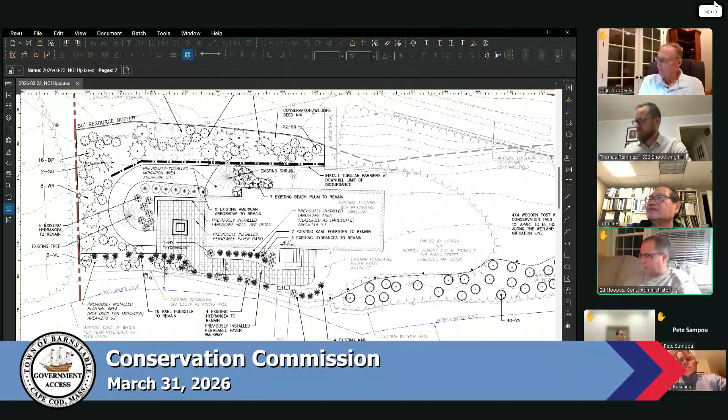This may be a moot point if you go the route of changing the walkway, but I still have an issue with the mitigation area as proposed on the east side of the property. Is the lighter line that you have there supposed to be representing the previous mitigation area that was already there for the previous patio filing from the 1990s, I think it was? Oh, this area here?

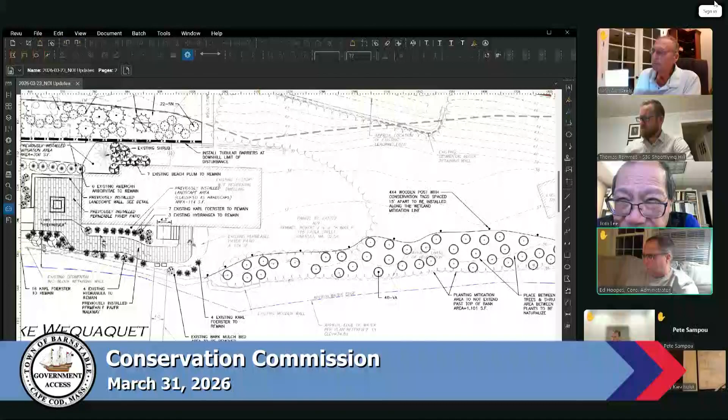That whole area to the right, because that whole area to the right there was about 1,000 square feet that were supposed to be used as mitigation for the previous patio that was permitted under a different filing. And that was also mitigated with 40 low bush blueberries. So the question is, is this limit that you have for the mitigation area basically repeating the same mitigation area, which is what it appears to be.

It appears to be imitating that same previous mitigation area, of which most of those plants have not survived. So are you adding anything to that area? It's not clear whether or not we're reestablishing that. We're reestablishing that area because over time, as you had mentioned, many of the blueberry bushes had perished, and that area had started to become overgrown with invasives. So whatever mitigation was proposed in that area has gone by.

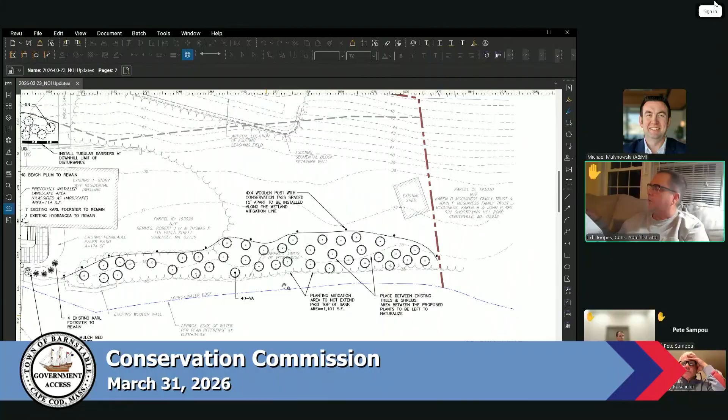So are you including that area then as part of your mitigation for this project? Is that part of the 2,327 square feet of proposed planting? Yes. Because right now that's not an area that's in any sort of well-maintained state. Right. So if that was 1,000, again, I don't remember the number off the top of my head, but if that was 1,000 square feet of mitigation from the previous filing, then you're still shy. Yeah, you're double counting.

Well, based on our discussions, Ed, previously, the commission didn't have any stipulations to maintain those mitigation areas in perpetuity. And where that area has gone to an unnatural area that is overgrown with invasives, the proposal is to remove those invasives and replant, which then constitutes a new mitigation area.

In all due respect, excuse me, I've got to jump in. I do not accept that reasoning whatsoever. That mitigation that was required earlier was legally required mitigation. It logically follows that it should be maintained in perpetuity. So to now say, oh, well, it died, and therefore I'm going to take a second credit for it, I respectfully disagree with that argument. Well, according to your rules at the time, there was no stipulation for that area to be maintained. Well, I would debate that.

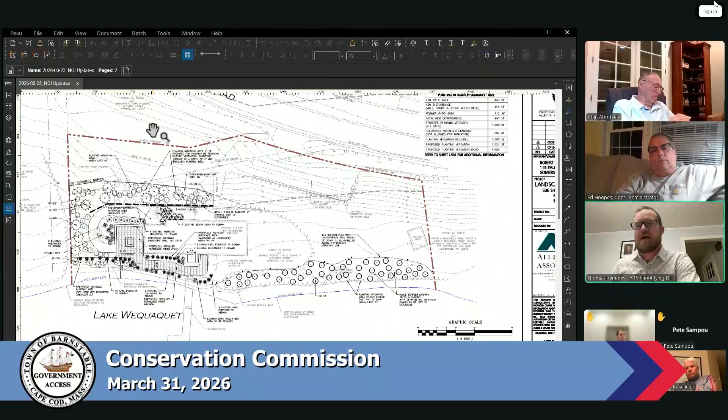Yeah, that's what we were under the interpretation: we would basically just add on to it. So if there were supposed to be 40 there before, we'd plant 80 to make up 40 from the previous that wasn't maintained, add 40 there, and probably add some additional native species in there for a mix of both high and low bushes to maintain that area.

There's not too much land left. The lot's very small. The house is small itself. The only thing that we kind of have is on the upper right portion of the plan where the grade starts going up. That's where the storage tanks are for the septic. And once we go into the gravity feed coming up, as soon as the town project is complete, we can also utilize that space for some more mitigation area as well.

Yeah, perhaps the history of the area between Lake Wequaquet and what is now the pervious pavers up to the deck or the patio area. Patio, yeah, you can definitely keep that. But that area there, if it has been historically grass or originally herbaceous, let me finish, please. Yep. Or herbaceous vegetation, those roots of those kinds of plants, and I'm not a horticulturalist, but my wife is, those kinds of plants don't hold on to the soil very well.

And I don't think either that pavers on top are going to hold, or your pervious walkway there is a good firm anchor of the soil underneath it. Yes, it's holding the top, but undercutting it, which is, I guess, what waves do, or even spilling over the top of your little wall there. I think that what would be best for preservation of your soils there, reducing erosion, would be some woody stuff that's got good, strong root systems.

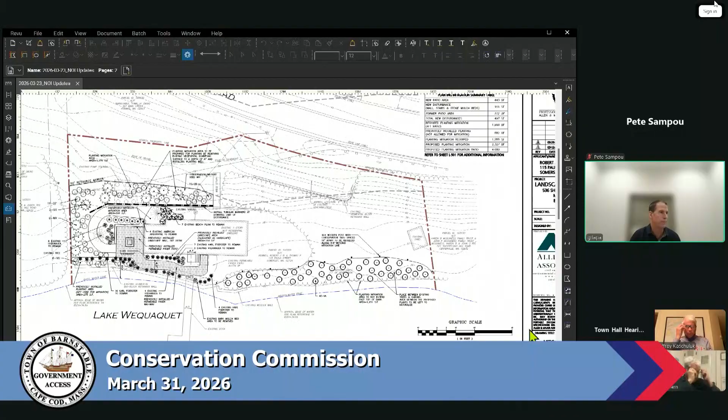Well, thank you for your comment. But one thing I just want to mention, under the Wetlands Protection Act, the view is not protected.

I understand. So this is something that you have to discuss with your neighbor and how you resolve that. So I just want to leave that at that.

I appreciate that, Commissioner. Robert or Tom, I've actually been trying to reach out to you. I thought I knew the landscaper who installed this for you, but apparently I don't. And then I just sent a message to Michael, you're the person that's on today. I would love to be able to talk to you guys about that. So I don't know if I can get your number and we can kind of work through that. Yeah, I can reach out to you. Right. So you guys should sort it out yourselves for that matter.

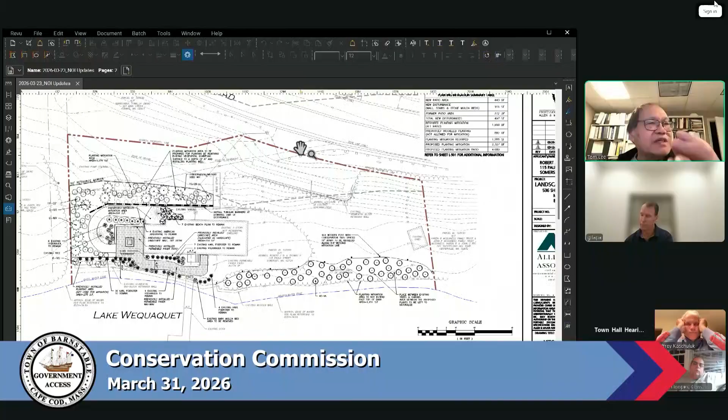So back to Michael and the homeowner, because we still have an issue with the walkway there. The one question I have is Bill is mentioning that he measured it as 4'10" versus 4'6". Is that correct? Well, my tape measure said, I measured at 3 places. I actually looked for the 4'6". I couldn't find a 4'6", but so yeah, I haven't personally measured it.

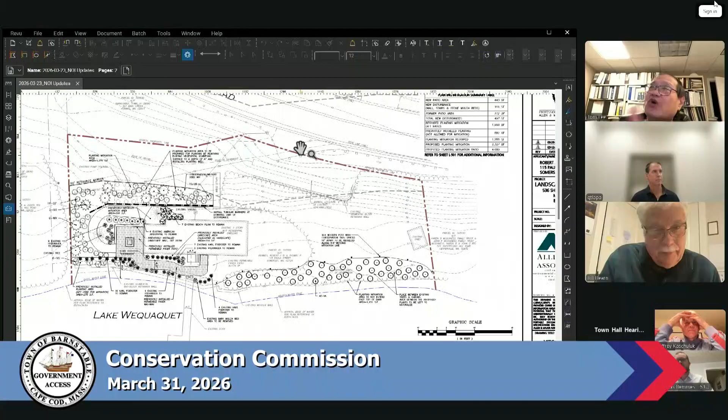So the other thing too is I think you should take the continuance seriously, thinking about the stepping stone and how to do that walkway stuff, trying to reduce it if possible, and then putting in some more mitigation area as we were talking about. Certainly you can double check with Ed and go over that again.

Yeah, I have a quick question. Would it be to completely remove the walkway and do a separate material, or if we just take the walkway and shorten it to 3 feet in width to make it more narrow, or do they want to eliminate the pervious pavers entirely for that walkway portion? I'd be in favor of just removing the permeable pavers and putting in modest stepping stones. I don't know about you, Jeffrey, but... Yeah, I am as well.

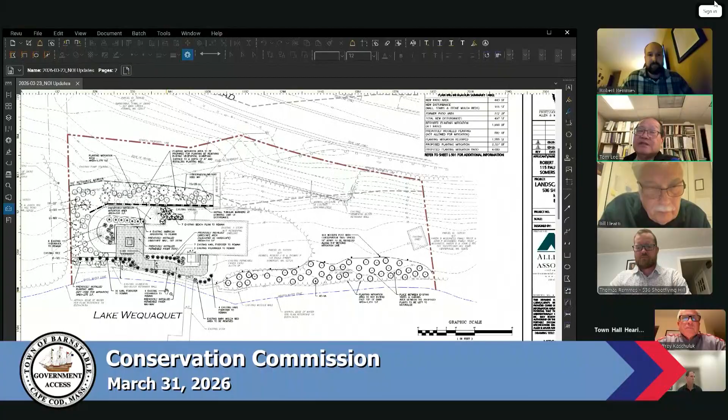Would that include the landing of the stair as well and leading to the dock, and then just continue from the dock to the patio as stepping stones? That was all previously brick for, I don't know, our lifetime, maybe before. A lot of these pavers were placed over where we previously had brick too. This was pre-existing walkway. But may not be that wide, right? No, yeah, absolutely, I understand. We're absolutely willing to work with you guys. We're doing what we can to try to accommodate what you guys want.

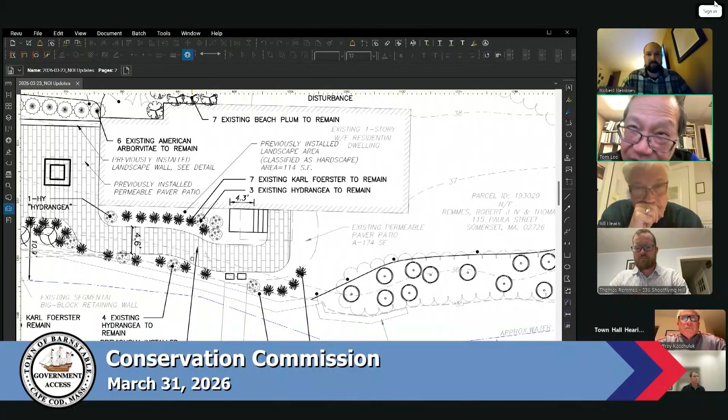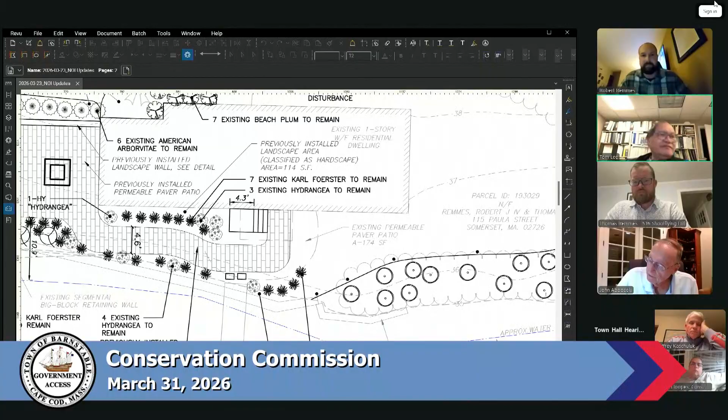Okay. So I think if I'm reading the commission right, we are leaning towards removing the walkway, putting in stepping stones in that area for your access, and redoing that mitigation calculation as per Ed's comments. Right. Yes, absolutely. If that's the case, then is April the 14th good for the continuance? Do you have enough time?

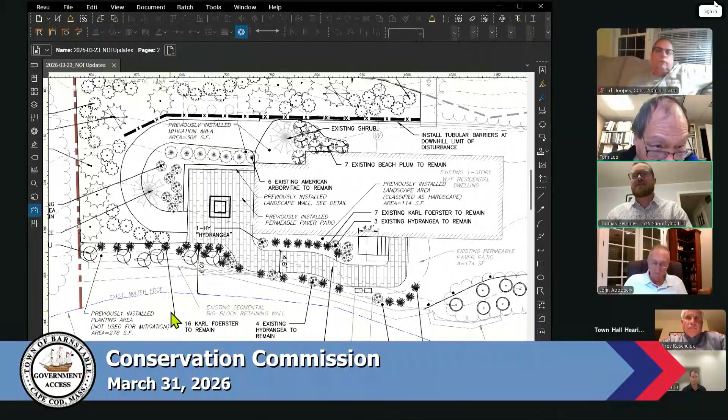The 14th, when would everything be required to be in by? It would be by the 7th. You should have the plan to the commission by the 7th then. Okay, so a week. Really tight. Yeah, I think we can handle that. Because if not, the following one is the 21st, which gives you another week. No, I'd like to go for the 14th, so that I'd be able to start planting some of this in the early season so it has a full year to mature.

Okay. Could I have a motion to continue these applications to April the 14th? So moved. Second. Roll call. Abadili, aye. DeMello, aye. Hearn, aye. Kashuluk, aye. Lee, aye. Sampu, aye. The motion carries. Thank you. Good luck. Please work on the revised plan and if you have any questions, talk to Ed on that one. Yeah, will do. Thank you.

We have 4 easy certificates of compliance. The first one is Joshua Garvey, SE3-5704. The second one is Kevin and Cynthia Kitts, SE3-5459. The third is Jeff Ingram, SE3-6134. And the last one is Daniel Alprin and Julie Ace Solomon, SE3-5944. Could I have a motion to approve?

So moved. Second. Roll call. Abadili, aye. DeMello, aye. Hearn, aye. Kashuluk, aye. Lee, aye. Sampu, aye. That's unanimous. The next hearing is April the 14th.

Could I have a motion to adjourn? So moved. Second. Roll call. Abadili, aye. DeMello, aye. Myself, aye. Kashulik, aye. Lee, aye. And Pete, aye. And the meeting is adjourned at 8:32.